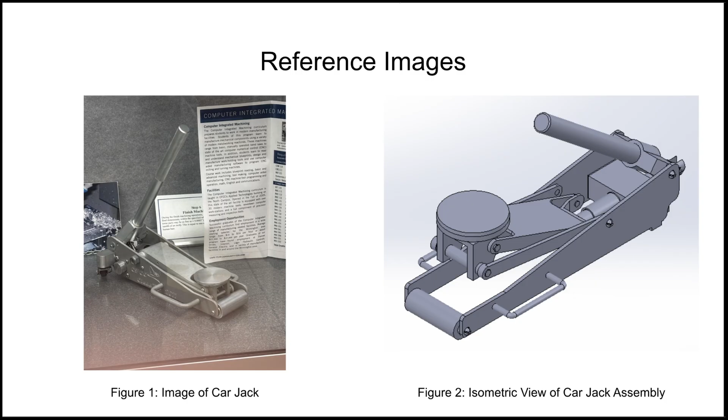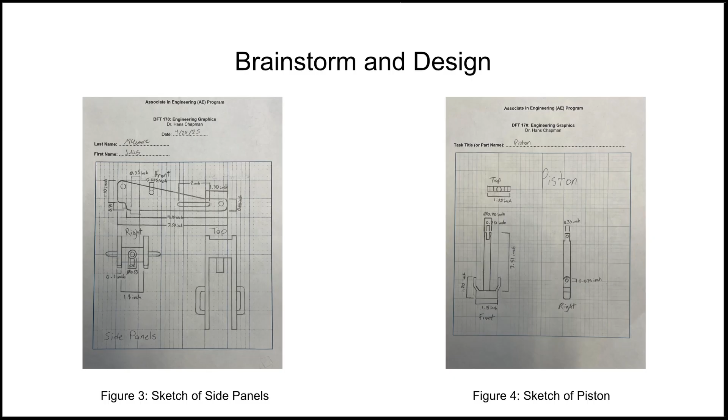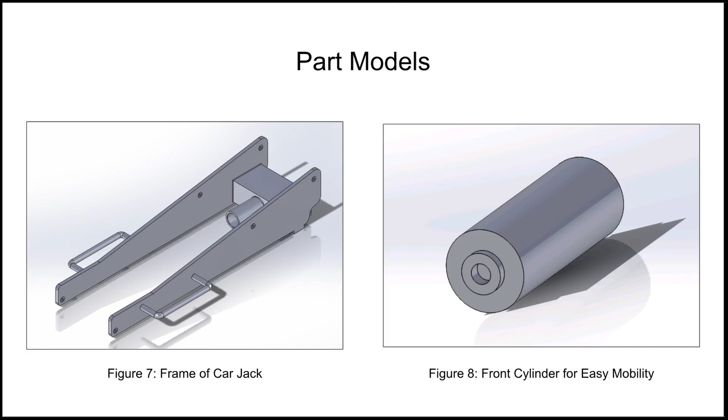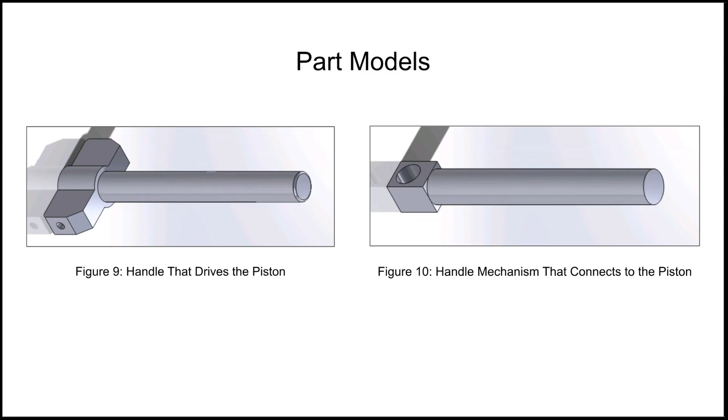Figures 9 and 10 are both part of the handle, and they were made pretty similarly. We revolved a rectangle to make the cylinder part, then drew a sketch at the base and extruded that. Then we chamfered the edges and extrude cut holes for fasteners.

Figure 11 shows the piston on the inside of the mechanism. We drew a circle and extruded it. Then, for the right side, we drew a rectangle and extrude cut. On the left side, we drew a sketch, mirrored it, and then extruded it. Afterwards, we filleted it and added holes with the extrude cut for basic fasteners.

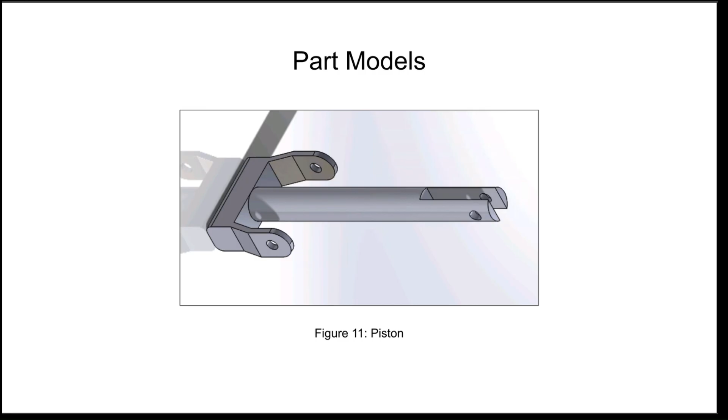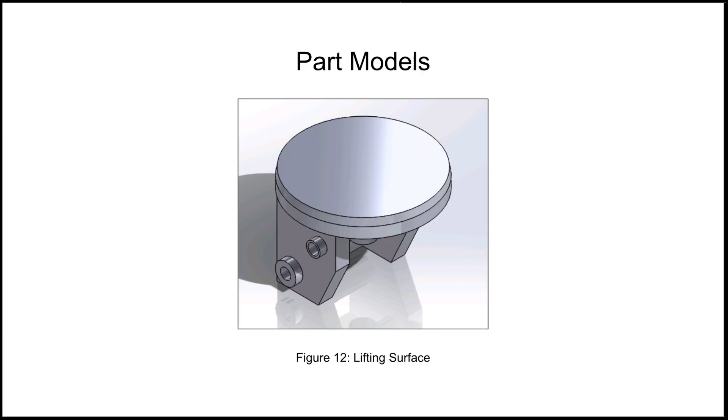Here we have the saddle. This was made pretty similarly — we had a circle which we extruded, and at the base of that we had rectangles which we extruded, and on the sides we extruded circles for fasteners.

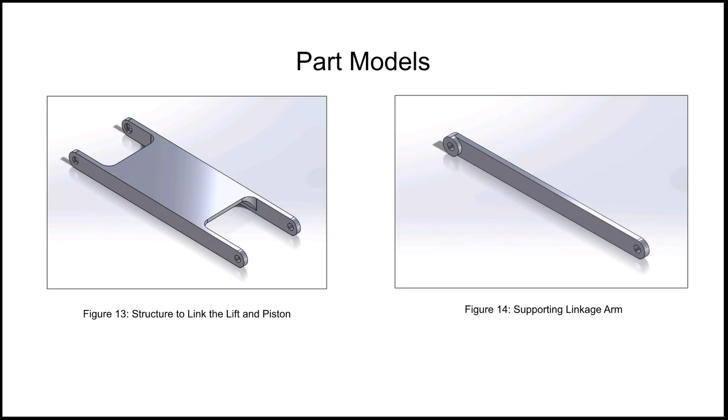Here we have the linkage arms. Both are pretty similar, except figure 13 shows two linkage arms that were connected using the extrude and fillet tools. Figure 14 has a basic linkage arm, except on the back end there's an extruded circle to merge the gap between the parts and give extra room for the mechanism to move.

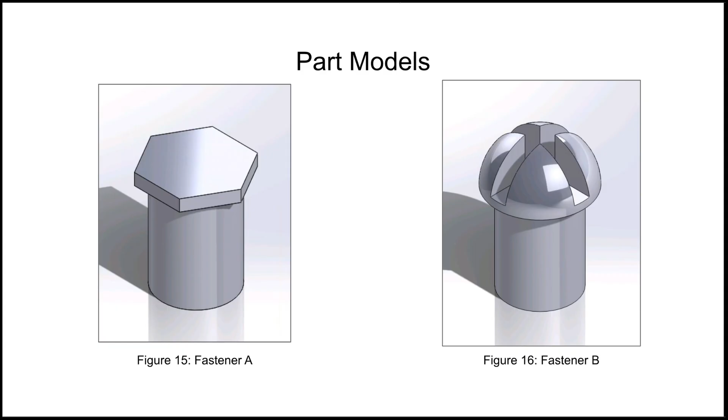Here we have two basic fasteners. Fastener A was made by extruding a circle and then extruding a hexagon on top of that. Fastener B was made by revolving a mushroom shape and then extrude cutting an X on the top. If we were making a real assembly, we would have had better fasteners with threads, but this assembly is more to just show the lifting mechanism.

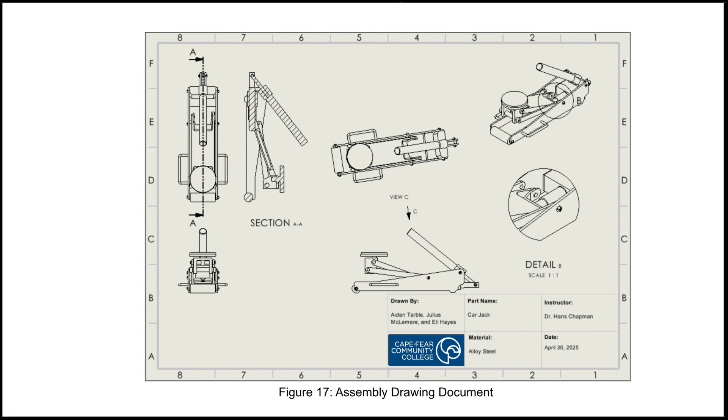Here we have our assembly drawing document. We have our front, top, and right side views, as well as our isometric view in the top right corner. We have section A that shows the inner mechanism by having a cut right down the center. We have detail view B that shows the detail view of the piston in isometric view. We have auxiliary view C that shows the angle of the slope of the frame.

Our simulation of the assembly, made out of alloy steel, showed that by putting 5 pounds of force on the lift, it deformed the linkage arms. Figure 20 shows the previously modeled arms for the mechanism, and the picture below it shows the reconstructed linkage arms.

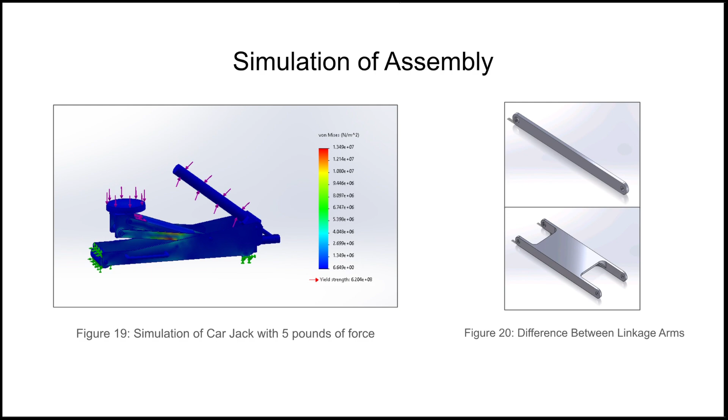Concluding remarks: through brainstorming and communicating effectively, it led to different ideas and solutions to create our final project. Our group sketched out all of the parts for our assembly to plan out our model using pencils, rulers, arc templates, and protractors. We worked together to model the different parts using the extrude, mirror, revolve, and reference geometry features.

Due to time constraints, we were unable to make the handle mechanism as good as it could have been, but with enough time, we would have redesigned the mechanism using things like a spring and a U-bracket. Given a real-world situation, it would be much harder to create and design a standard car jack. Our simulation showed we would need stronger arms — by making the arms bigger, it would give more support for a heavy weight on the lift.

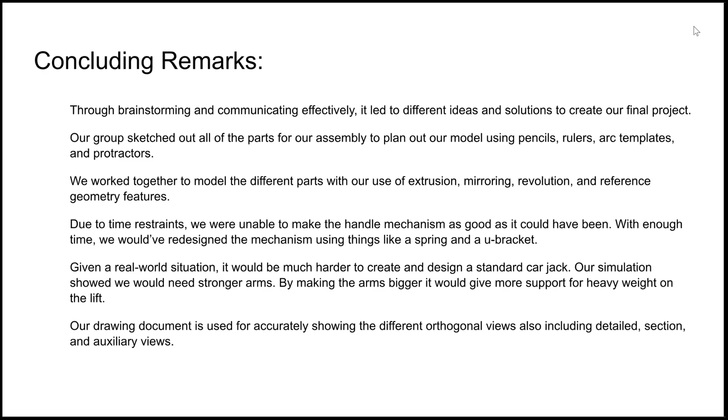Our drawing document is used for accurately showing the different orthogonal views, also including detail, section, and auxiliary views.